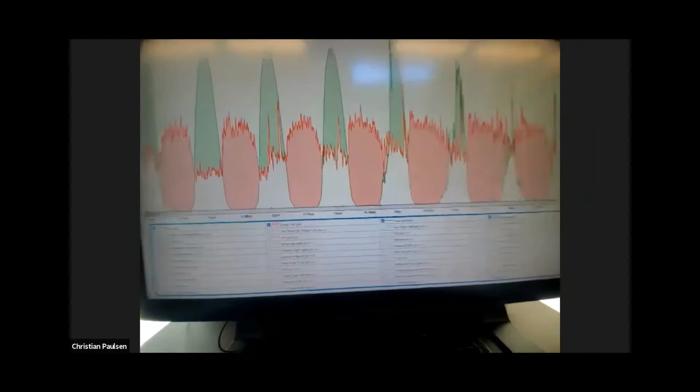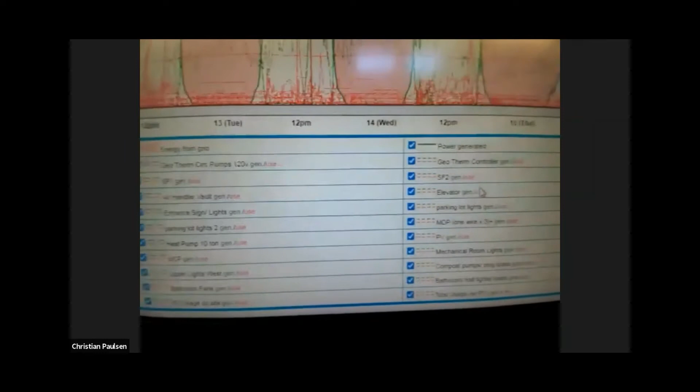And then the fun part, all of these little toggles down here at the bottom are the circuits that we are monitoring. If I toggle them all off, one of my favorite circuits to show, oops, sorry, I gotta toggle them back off again, is our dishwasher, because it gives you a nice idea of its energy use and gets little peaks when it heats up the water. It's a highly efficient Energy Star rated dishwasher, but when it kicks on, it does use a decent amount of energy. So we can keep an eye on things around here.

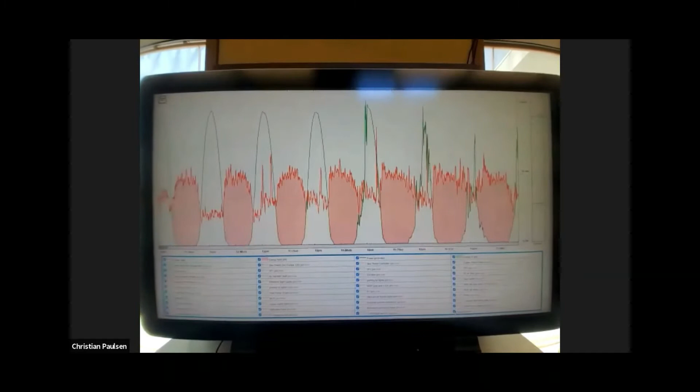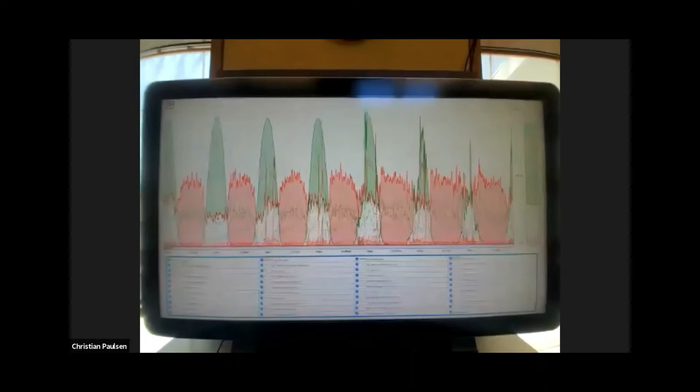If there's a problem with the system, eGauge helps us identify it and rectify it. We noticed that half of our solar panels weren't functioning, and by watching eGauge, we were able to get that issue resolved right away. We also use eGauge to monitor our patterns. One of our employees saw how much energy the elevator was using, which is a low energy elevator that uses about 70% less energy than a typical one. I can even show you that one. Someone just went on the elevator too.

It's all catching up again. Okay. Rianne, I heard you guys lost me for a sec. Just for a sec, but we're back now. What exactly are you showing right now?

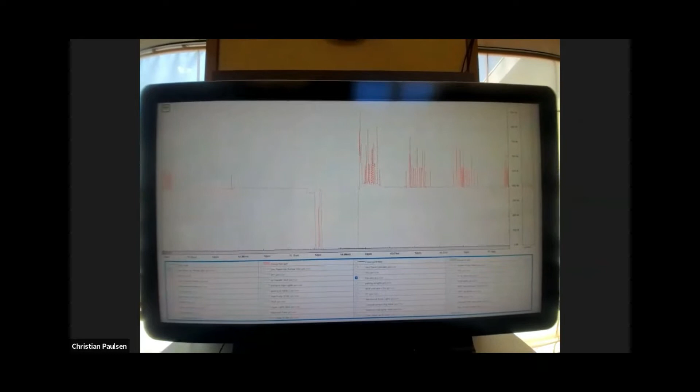Is this the elevator? This is the elevator use. Yep. This will show you, we actually had our elevator go down. This little gap right here is because it stopped working for a 24-hour period or so, and then we got it fixed, and we're back on using it again. This is such a useful tool especially for commercial buildings, but they also have residential applications. I sent a link into the chat for folks who might be interested in checking this system out.

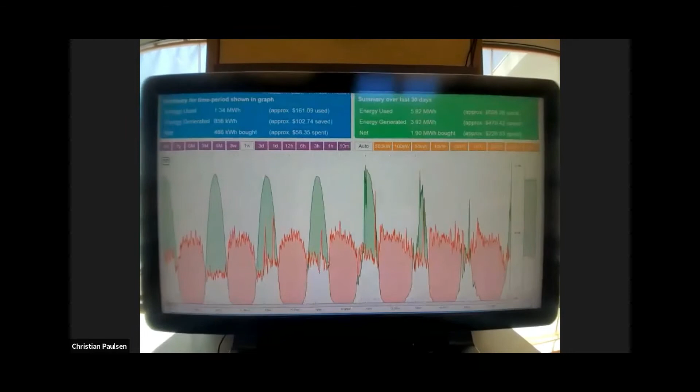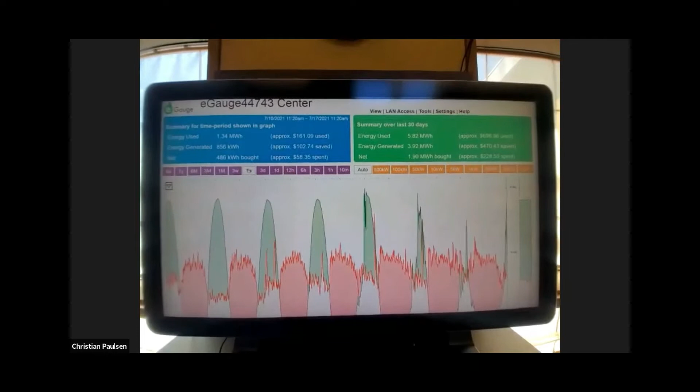You can also see the prices of your energy use per month. I'm not sure how we have it set up, but right here, yeah. Are you talking about up at the top here? Yeah. So this graph shows us the energy that we used in this time frame. I happen to have picked a week. We have used 1.34 megawatt hours of energy this week, and you can tell what our solar panels have generated as well.

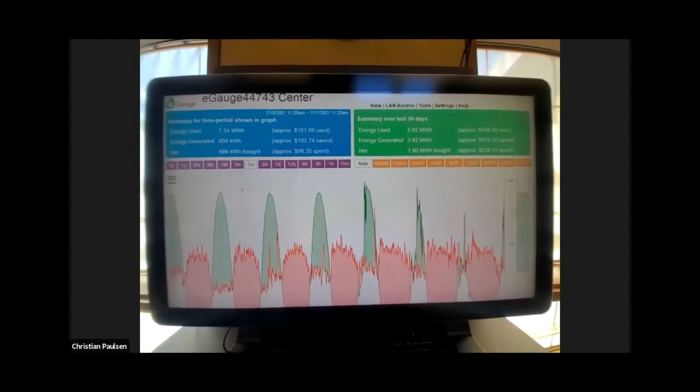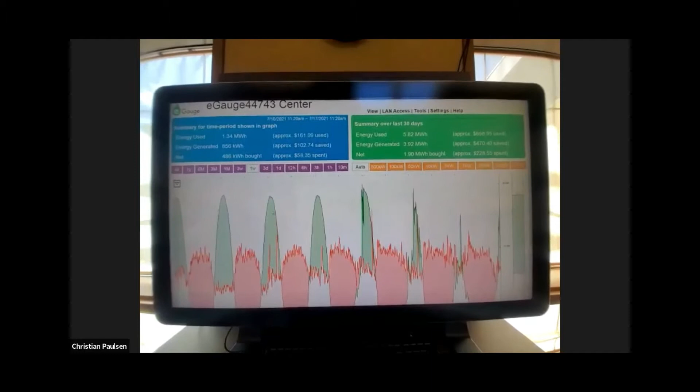Our solar panels produce about 45% of our energy needs during the summer, but annually it comes down to about 18 to 20% of our energy use. We are a building that has a number of refrigerators, so we have a relatively higher energy use than a typical building. And then here's the monthly that you were referring to up here.

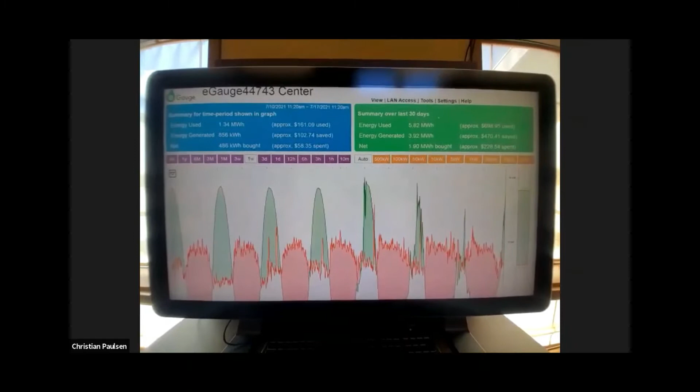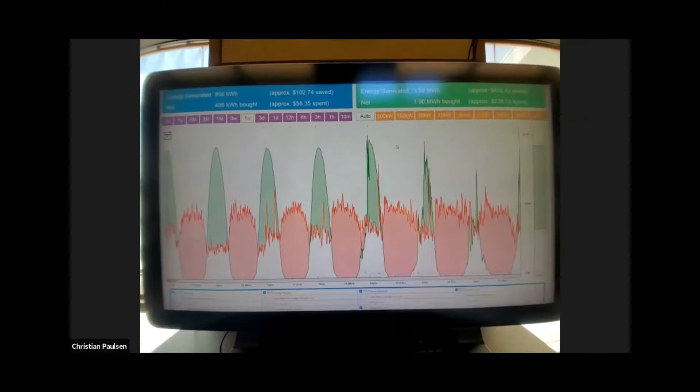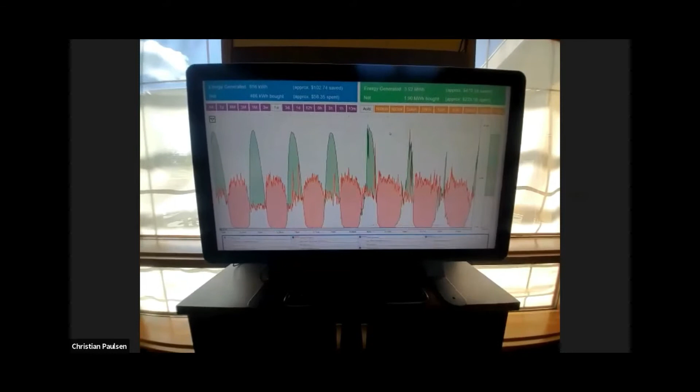Do we have questions about eGauge or energy monitoring before we head outside and let Chris show you our solar panels and talk about our living roof and how we manage water here on the property? Awesome. If any questions come up on past topics, since we're asking you all to type now, we'll funnel those in at a good time. Okay, so we're going to transition outside, and I'm going to film Chris while he talks about our living roof. Thanks again for sticking with us.

I'm going to mute myself.

But we'll get it back. It kind of loses it for a second. And Chris, we might need him to unmute if he's talking. So I've spotlighted Kelly showing Chris. Oh, there we go. Hello, everyone. Can you hear me? Yep, okay.

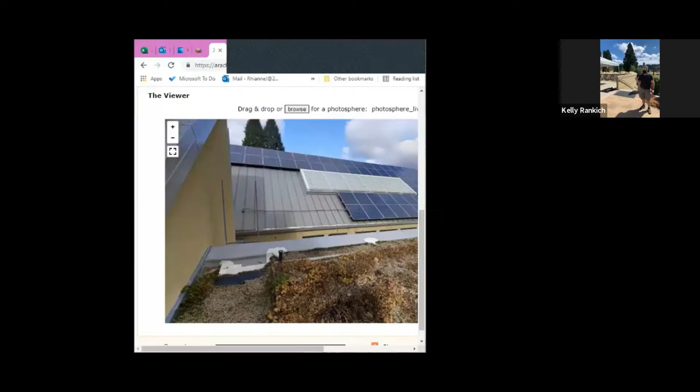You sound great. My name's Chris Paulsen. I'm the facilities technician here at 21 Acres, and I'm going to tell you about the living roof that we have, which will have a 3D picture accompanying this info. As you can see, we have two main sloped roofs that have been fitted with a big honeycomb mesh that retains a high drainage soil replacement called substrate. This stuff is specifically referred to as extensive soil media or substrate media, and it's seeded with a type of succulent called sedums, which are drought resistant.

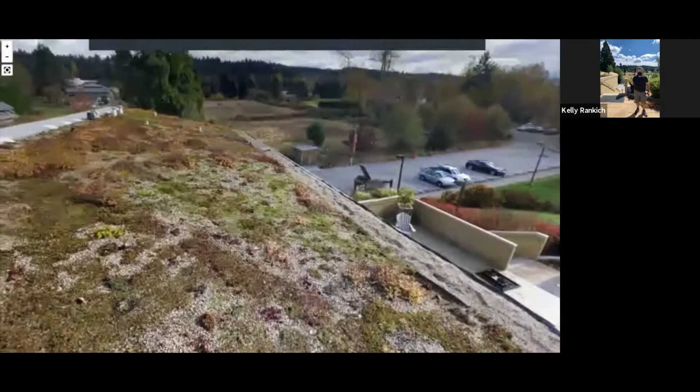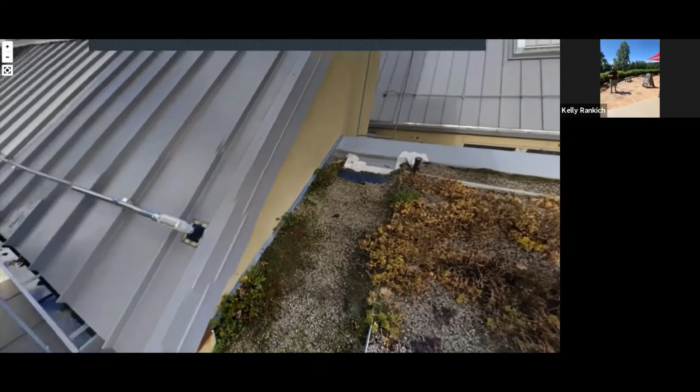This system helps with a number of things with our building, including cooling the building with the excess biomass, carbon locking with the amount of plant matter growing up there, and it also helps to slow stormwater that will come coursing down in any rain events or snow before it goes into our gray and black water treatment system that we have on site. All of the water that comes into this facility is treated on site and returned to the water table here.

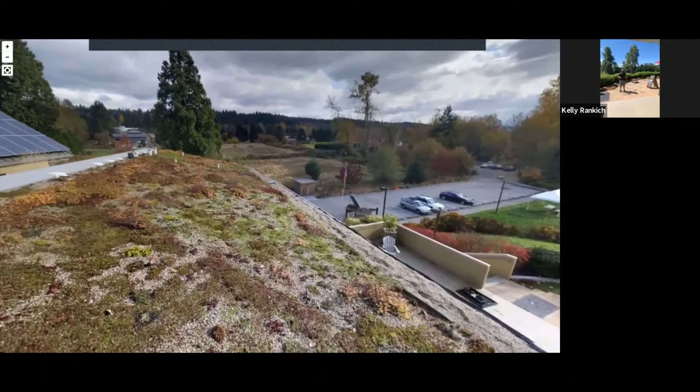It gets filtered through an aerobic and an anaerobic process and pumped out to these Glendon biomounds that we have out near some orchards. So they feed our apple trees. It's a closed, well, I guess it's an open system. It's just a one-way system that brings water in from a well that we have to pump to offset our agricultural water use with the sustainable farm that's in the back 17.

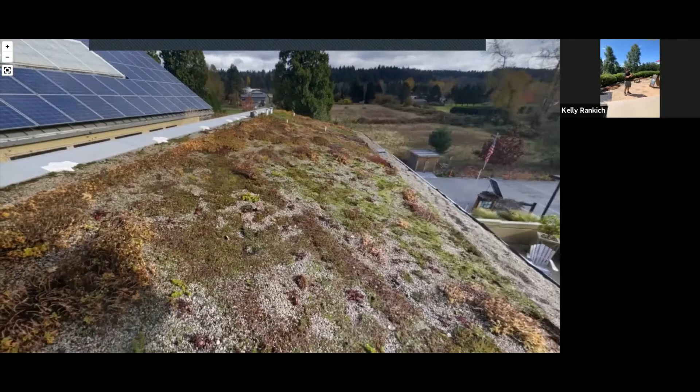And I guess we could go to the 3D picture, which we have here. Good, I can comment on this. Rianne will be panning right to left. You can see our living roof here with the sedums, and this picture was taken in either fall or early spring, so a lot of the plant matter is kind of idle right now, but it blooms right back into this massive sea of flowers.

Here you can see some of the solar array. We have a 25 kilowatt solar array on the roof. That's half of the array right there. The other half is on the other wing of the building, along with the translucent skylights, which are very special insulated R20 value skylights, which we'll be able to see from the inside in a minute, that help to naturally light our building while retaining heat inside in the winter months. Very useful during the winter months. But yeah, that's our green living roof.

Thank you. So then I'm gonna spotlight Chris's phone again. Okay, can you hear me okay? You sound perfect. Thanks everyone for sticking with us.

We had a comment from Emilio who says, "Is this a green roof, right? Tetto verde in Italiano, insulated from the hot, cold, and moisture." That is correct. Tetto verde. I love that.

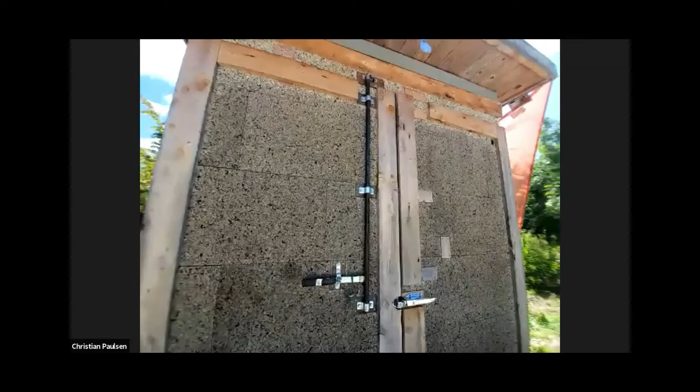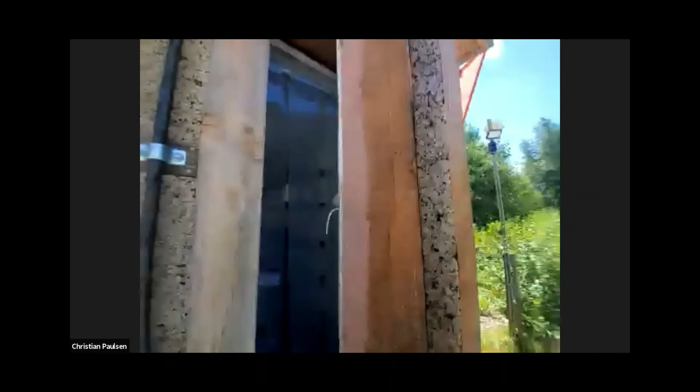They are OSB boards with kind of a styrofoam type foam in the middle. And then the outer layer of the FRU, if you can see that, is made out of 2-inch thick cork. And cork is really the latest and greatest in sustainable materials. It's not harvested in terms of cutting the tree down. You actually harvest it by shaving the bark of a tree.

And then it becomes a carbon sink. So everywhere, we're trying to find ways to get carbon out of the atmosphere and keep it out of the atmosphere. And using cork is a wonderful way of doing that. And the FRU here is heated with a heat pump. Heat pumps are basically like we're tricking it. It's almost like an air conditioner, but we tell it to cool it extra low so that it keeps the temperature in there that's appropriate for produce.

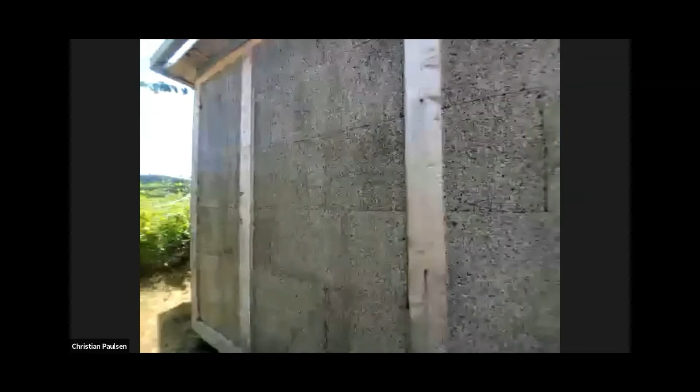And I'm going to step away to see where Chris ended up. Oh, he's kind of zoomed in on the FRU.

Our FRU was originally designed to get a certification in the Living Building Challenge, but would have needed to have solar panels installed on top, which was the original intent. But somewhere along the way, we ended up having to pull out of the Living Building Challenge for the FRU.

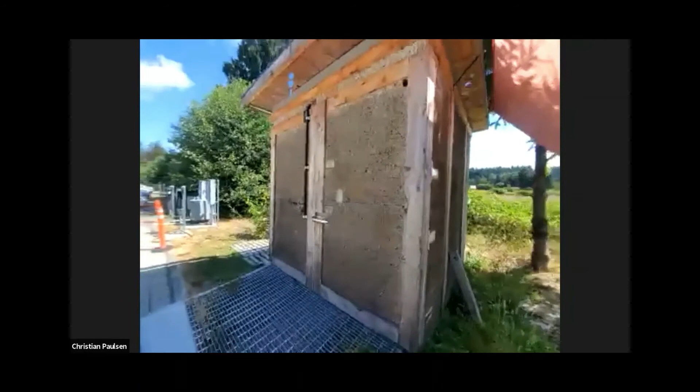So Chris is going to come back up here. Do you want to show? And we have permeable pavers down there. Yes. Permeable pavers are great for slowing down stormwater runoff and help to filter the different contaminants and debris that can come off of cars. That's an easy thing that people can incorporate at home.

I feel like that's my favorite sustainable technology, is how we've incorporated the permeable pavers into the bioswale, because we are bordering a pretty good size small city right next to the farm, and we're the buffer between the city and the whole farmland of the Sammamish Valley. And actually, Chris, one more thing, could you show the terraced pavers down there? Because you can actually see them on this tour.

The building is built on a hill, and all of the little grooves in between the pavers allow for the water to filter and go directly back into this hill. That also helps cool the building. But whenever we have flooding here in Seattle, or Washington, which is every other season, there is never an issue in our parking lots. All of my friends' apartments last fall were flooded, and our parking lots were giving back to the ecosystem, which was amazing.

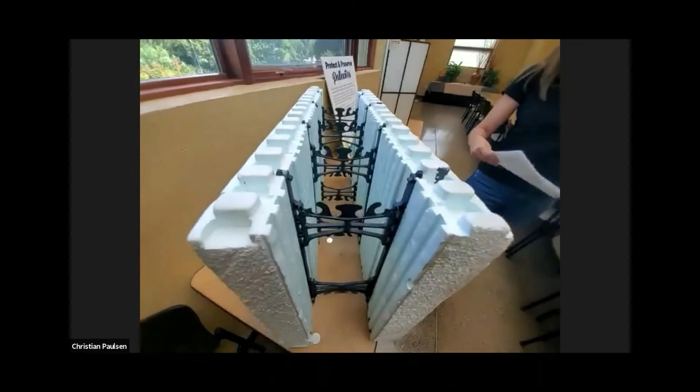And then another highlight of our building that people love to learn about is how the building walls were constructed. These are called insulated concrete forms, or ICF. It's 2 layers of styrofoam with these plastic inserts that are used to hold the rebar. And then the concrete is poured inside of these forms here. It saves a huge amount of concrete in the construction of the building.

And then it also saved a lot of styrofoam from going into the landfill. I was trying to find my stat here. I think it's 17,000 pounds. So yeah, 17,000 pounds of styrofoam were kept out of the landfill by using these insulated concrete forms. Are there any questions about these topics?

We did get a question about the living roof. And before we do that, I just wish that there were more of these kinds of materials used in buildings. Do you know if there's any initiatives in Seattle that are asking folks to make sure new construction has an aspect of diverting waste in their building code or anything? It's kind of a far out question.

Yeah, and that's funny because I actually wanted to dig into that a little bit more before this talk today, but I ran out of time, and I don't want to say anything wrong. But I do know the City of Seattle is, I won't be able to quote the stats perfectly, but they're requiring lots of new construction, and I can't remember the criteria, to use the Built Green certification. So I think they have to have a minimum of 3 stars. And Built Green has 3, 4, or 5 stars, but that's a very local thing that's specific to either Washington State or King and Snohomish County here.

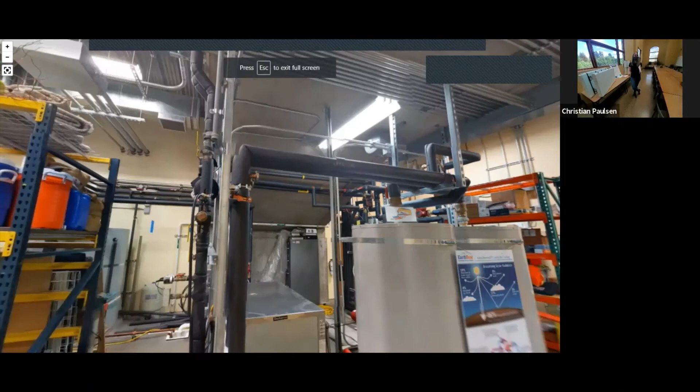and then we're transferring it using our heat pumps that are in the mechanical room, take that heat out of the coils, and it transfers it into the fluid that's running and radiating throughout our radiant floor system. And then the heat pumps, of course, using electricity, add extra energy to the system to get the water up to temperature. And I just pulled up the screen share.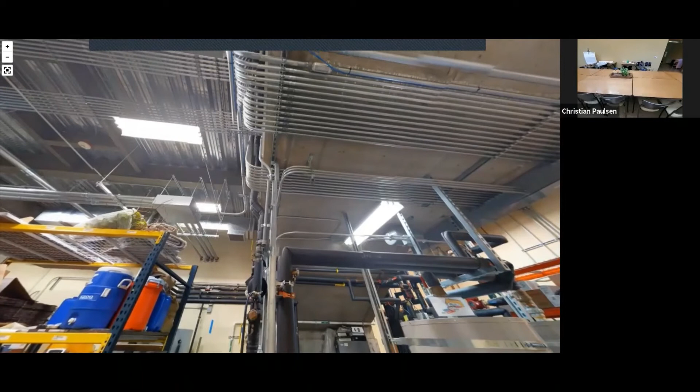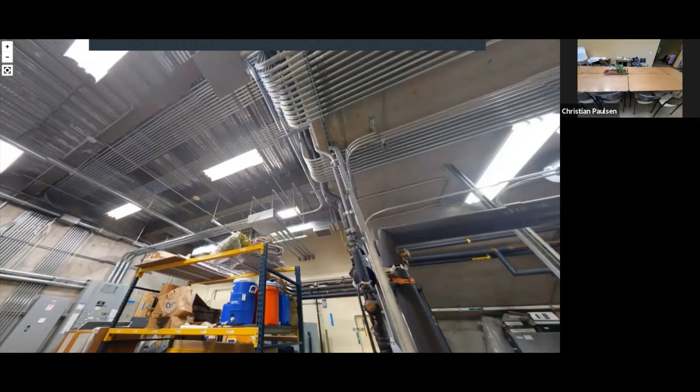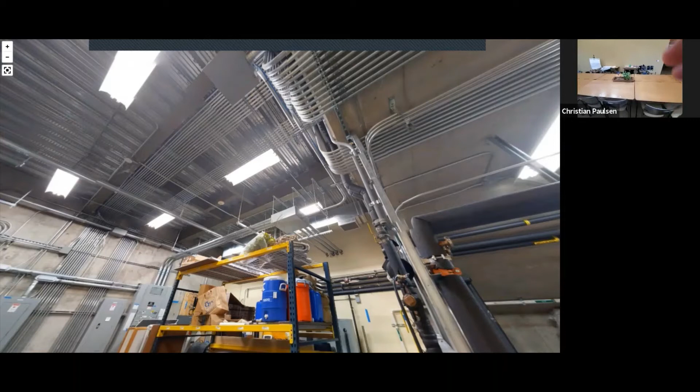So yeah, all of these multitude of coils is what Kelly was referencing. I'm not sure exactly which ones. So we have a lot of conduit in there, and it's so pretty if you're like an engineer type. So if you can turn it around like 180 degrees, or keep going around. We can try to see the ground loop piping. I was trying to show that, well, I'll just let you keep

scrolling while I chat. So a typical furnace, you're using an energy source, whether it's electricity or natural gas, to heat your house, and you're generally capturing 80 to 90% of that efficiency. You lose a little bit in terms of heating your home. With our system right here, we're actually 320% efficient. So we're actually more efficient because we're capturing that heat that's coming from the ground. So we don't have a combustion source in our mechanical room to heat or cool our building, but we have heat pumps that do our domestic hot water as well.

Yeah, if you keep going, that tank, right, that's our buffer tank for our radiant floor. This one? And up above, go up above those closets there. That's the ground loop system. I think you can see it. Oh. Yeah, that's hard to see. Oh, sorry, we're trying to play with our technology right now. So okay, well that is our mechanical room. And then down in there too, we have our inverters for our solar panels.

And back behind, we can't see this right now in the tour, but our ventilation room is pretty exciting. So we have 2 ventilation tubes for our building that are about 5 feet wide each. Don't actually know how long they are off the top of my head. And they're pulling in fresh air from outside. That air gets filtered through electrostatic filters. And that's what we circulate through the building when we run our ventilation system.

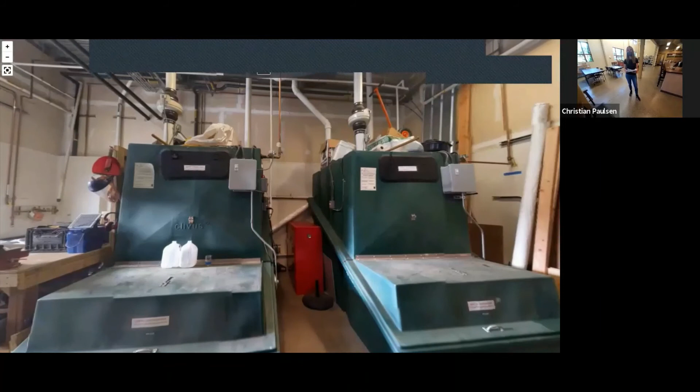They've been in use since 2011. We have never had to empty them. The maintenance that we need to do is to just kind of level everything out once a month, and then a little bit of water goes in there to keep the right moisture level. And then we sprinkle sawdust on there when we do the raking part.

There's red wiggler worms in there, and the worms and the bacteria eat everything down. It's composted down so that we have not had to empty them yet. Based on what I see, I think we probably have 10 more years to go before we might have to think about emptying them. The leachate from them does get treated in our on-site wastewater treatment system.

When you really understand, these 2 giant green bins completely remove us from needing waste stream services, along with the other great water treatment berms that we have around the facility. You really are confronted by your waste and see exactly what's going on. But the cool part is you don't even see the waste down here where the cursor is.

This is where, if there is any maintenance, you remove it and then decide what you're going to do with that waste, whether you send it to another composting facility or use it in the landscape, not usually for the farm, but you can. This whole thing is where you can collect from, and there is literally nothing in there besides some cobwebs and some bark.

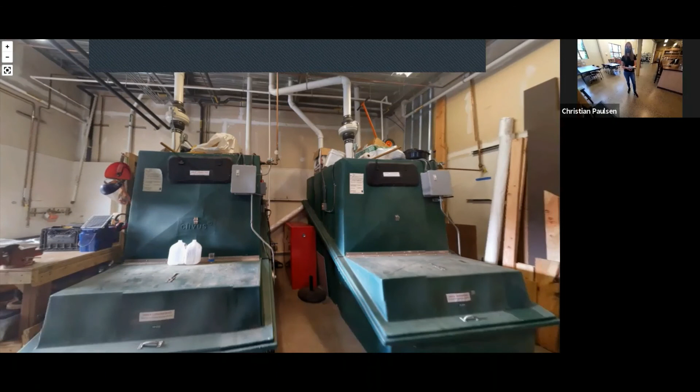There's a couple of little wood chips in there, but if this technology could be installed in high traffic institutions like colleges, anywhere that has 2 floors to account for the gravity it takes to feed the stuff down the tubes, this would save so much water, so much pollution, and really give back to the ecosystems that we're constantly siphoning nutrients from. There's just worms in here because they're such efficient digesters.

In an ideal world, you have what's called a closed loop system. You don't have waste. Back in the day, they really didn't generate waste. Things were reused or repurposed. Look at what your outputs are, and how do you make an output an input? How do you lower it, and how do you reuse it, such as turning human waste into compost and feeding the plants. So, do we have questions about the composters?